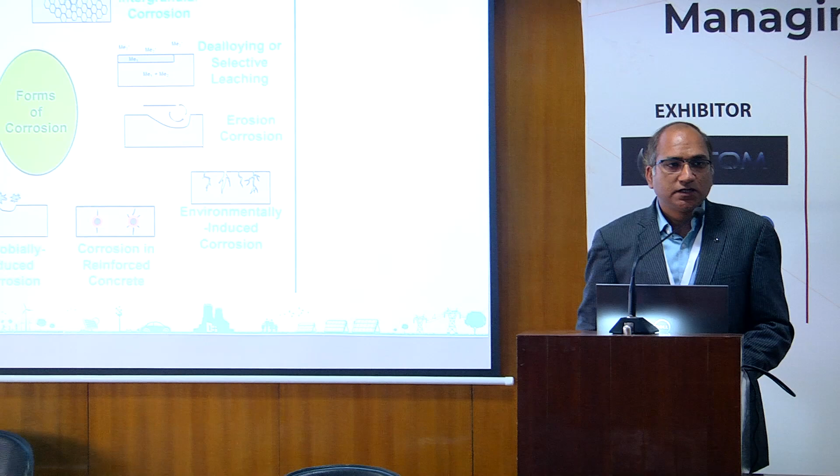The forms of corrosion, what we learn from different seminars and workshops - of course we are not experts in this. The gathering itself is so much expert in explaining these different forms of corrosion.

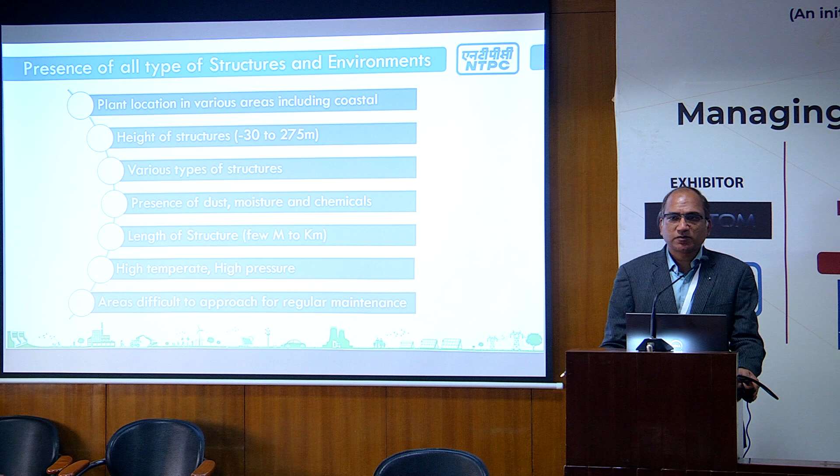Now coming to the power plants, what is different with relation to corrosion. When we talk about so many industries, I think thermal power plants are one of the industries which are most affected, because we have the most varied opportunities to invite corrosion.

We have plant locations in all parts of the country, whether it is C1 or C5 category, it doesn't matter. We have structures of varied heights, whether underground up to 30 meters or above ground up to about 275 meters. We have a variety of structures, and the corrosion effect is present in all types of structures. We have the presence of dust, moisture and chemicals, which are the main key players in the role of corrosion.

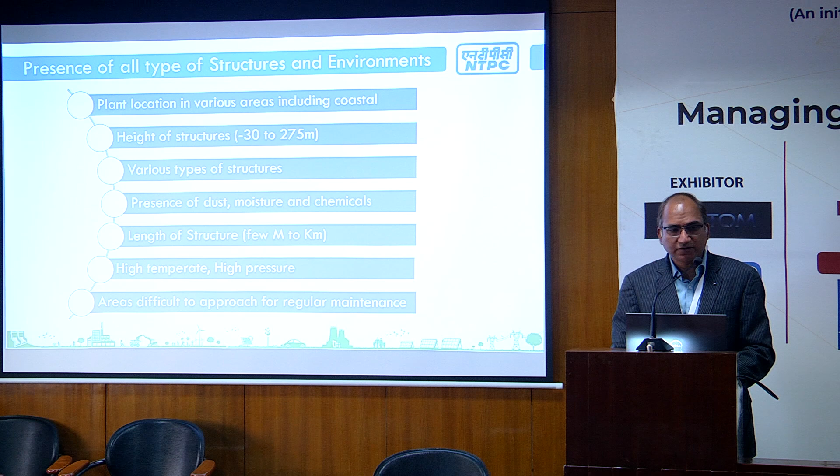When we talk about the size of structures, we have a few meter structures as well as few kilometers also. We have high temperature, high pressure, and high difficulty areas for approach. So basically, we are the most affected industry related to corrosion.

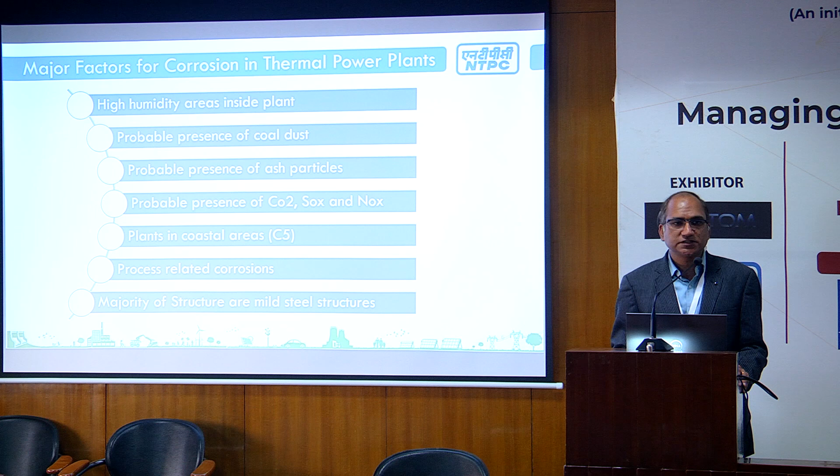In our industry, the major factors which affect our structures and lead to corrosion are humidity, the probable presence of coal dust - of course the plants are designed such that we should not face any coal dust or ash particles, but the practical problems cannot be ignored - the presence of SOx, NOx and CO2, plants in coastal areas, then process related corrosion because there are many processes involved in thermal plants, and of course the structures are mainly steel structures, which are more prone to corrosion.

Combining all this, I am summarizing the corrosion in our thermal power plant into two categories. One is process related, which we face in different processes, whether it could be an FGD plant, a water treatment plant, or a boiler structure. These process related things we take care of in the design parameters, but of course we have to face surprises.

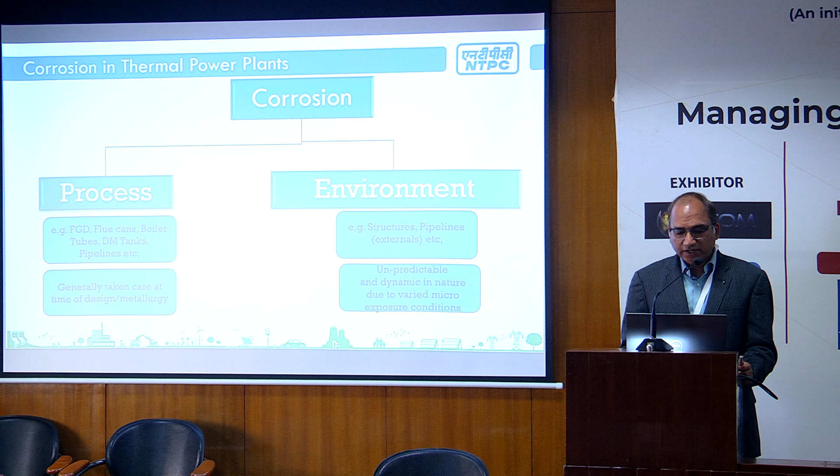Then second is the environment. This is common for all of us. We have structures and pipelines everywhere which are affected by the environment and corrosion, and these are some unpredictable and dynamic things which we cannot control.

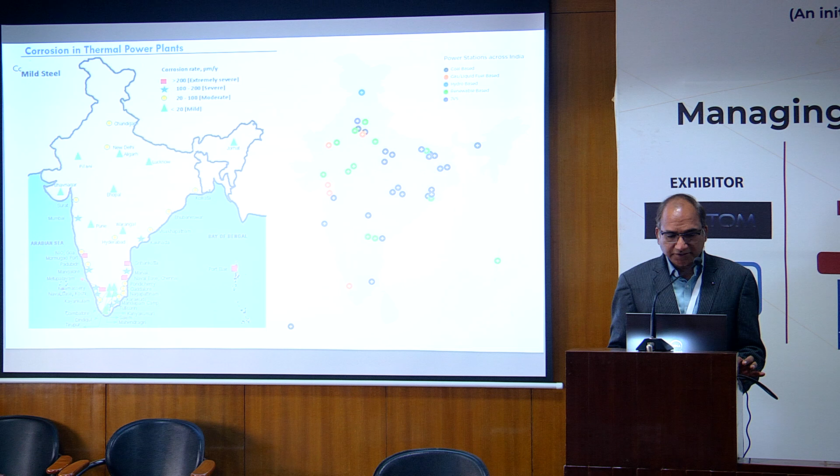When I talk about the volume of corrosion in our thermal plant industry, I want to correlate with two figures of cost and area. The paint procurement yearly may be up to the value of crores - 40 crore is just a figure. And when I say about the painting area of work involved, it is a few lakhs of painting in only a single system of the coal handling plant. So I'm just quoting these two figures to correlate how big the problem is for our industry.

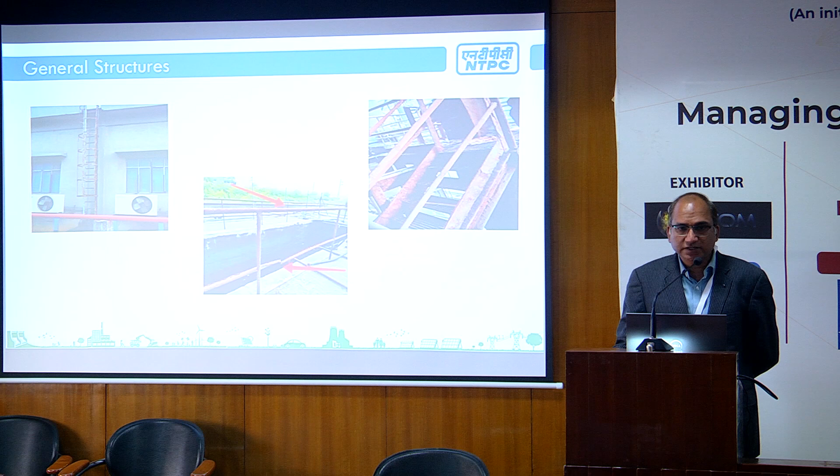Just sharing a few of the problem areas in our structures. These are pics of small structures where we are facing corrosion problems, like a staircase or a railing. These structures are small, but the effect could be a lot of safety hazards for us.

Coming to the big structures of the coal galleries and conveyor galleries, we are facing a lot of corrosion related issues. Because of these issues, we have to do continuous maintenance. I wouldn't say the structures are failing, but continuous maintenance and monitoring is required.

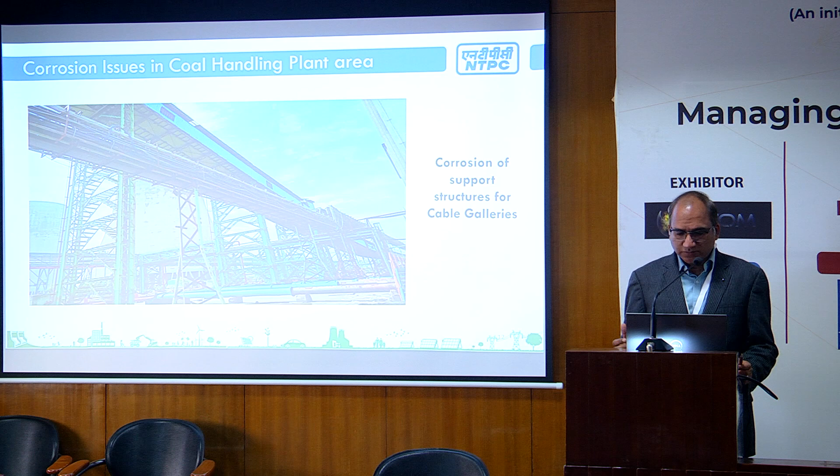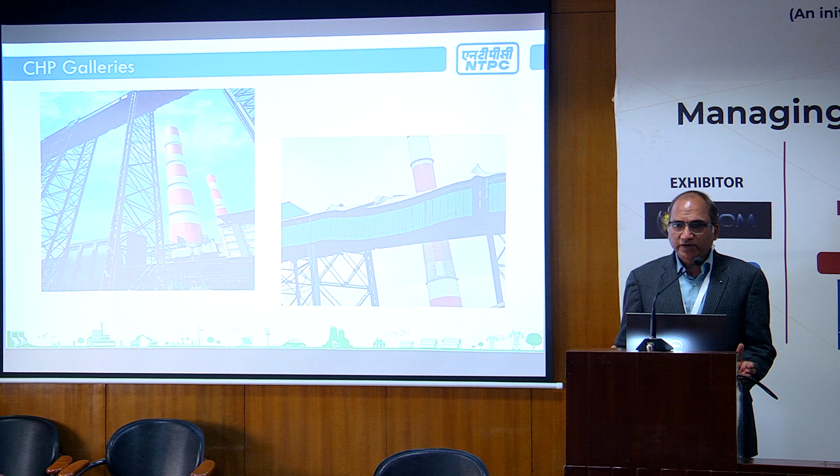A few more pics of the CHP galleries. Here we have CHP galleries of height up to 60 to 70 meters. So to maintain them, to paint them, is itself a big task. As a civil engineer, even providing shuttering is a big task, let alone the painting, how to do it.

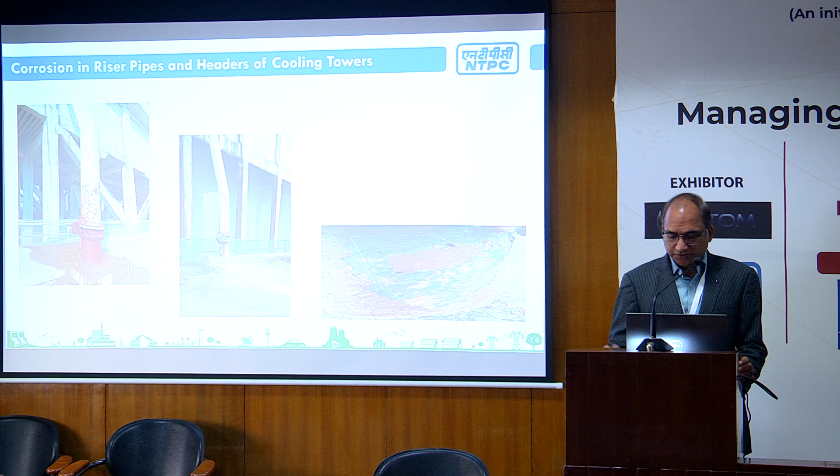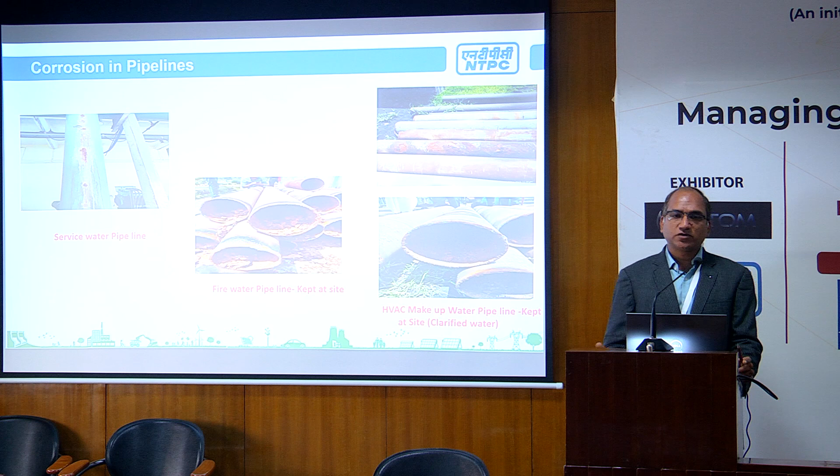Coming to some water related structures, in our cooling towers, in our pipe connections, everywhere we are facing the problem of corrosion. Sharing a few pics of the plant where we face these problems. When talking about thermal plants, we have many pipelines for makeup water requirements and various process related environments, and everywhere we face this corrosion problem.

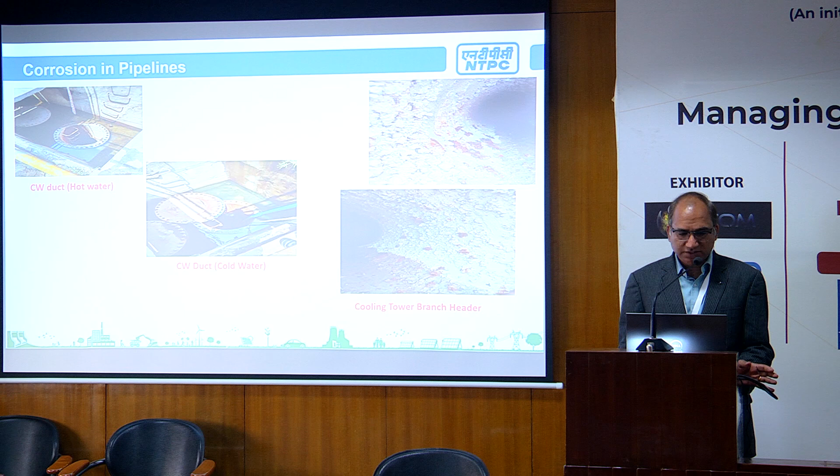There are some pics of our CW duct where we are facing problems. All these ducts are underground, so corrosion there really creates problems. We also have sea structures in sea water, where the problem of corrosion is even more.

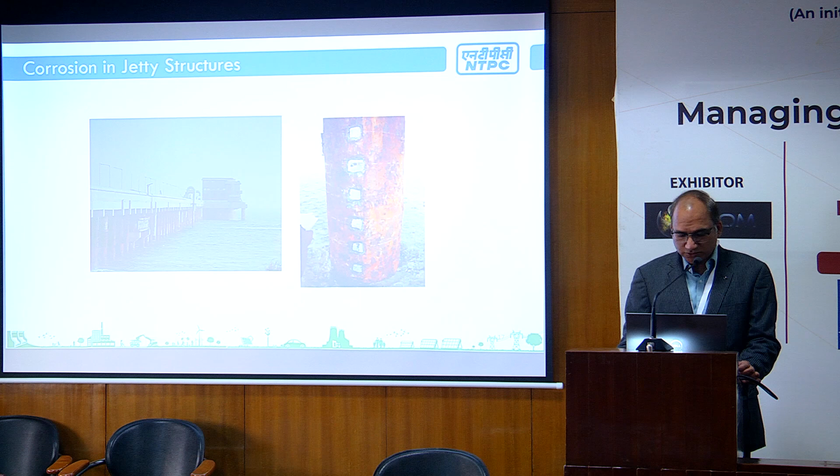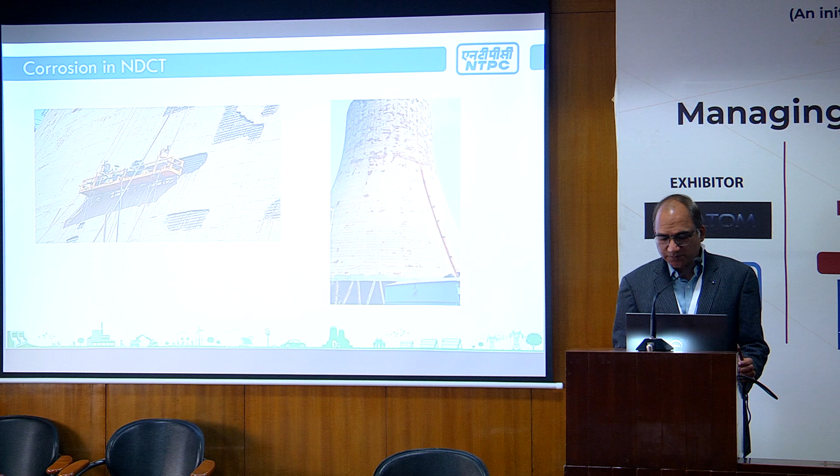So we are facing a lot of problems, and we have many structures where we need to solve upon this. This is a pic of our NDCT cooling tower, where corrosion related issues are there, showing how the concrete is getting spalled away because of corrosion of the reinforcement.

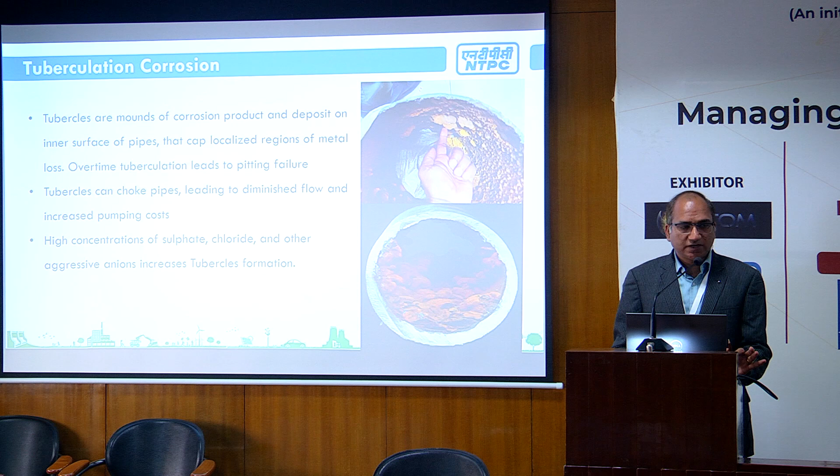Tuberculation corrosion is also observed in our fire pipelines. So this is just a problem statement that we are facing, which we have to deal with. As mentioned in the morning session, the theme relates to managing corrosion - so we are not avoiding corrosion, we are managing it in some way.

Some of the solutions we have adopted in our running plants for mitigation of corrosion: first is replacement of material. We have replaced materials in some cases, like in the pipelines, across different areas and approaches. We have also increased the efficiency of our drift eliminators to decrease moisture content in the environment, so that our steel structures get less corrosion.

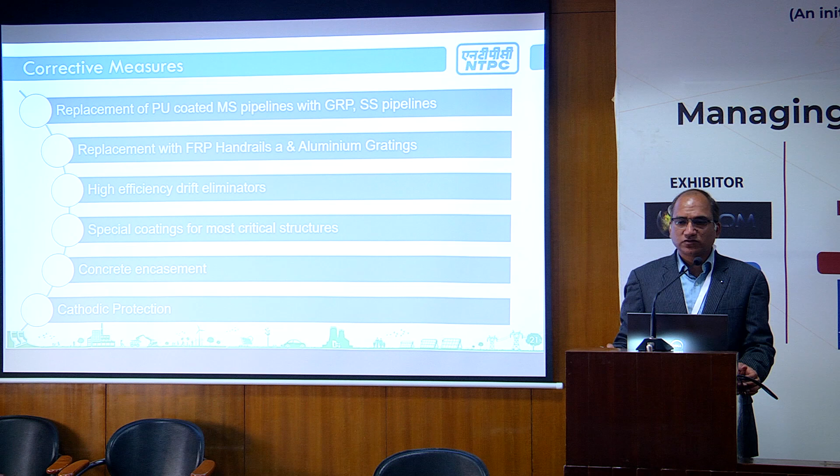We adopted special coatings for maintenance works and for coating application and painting works. We are also providing concrete encasement in some cases, because basically the corrosion we face is at the interface of a concrete floor and a steel structure. If we provide concrete encasement, this may prove to be a good result in future.

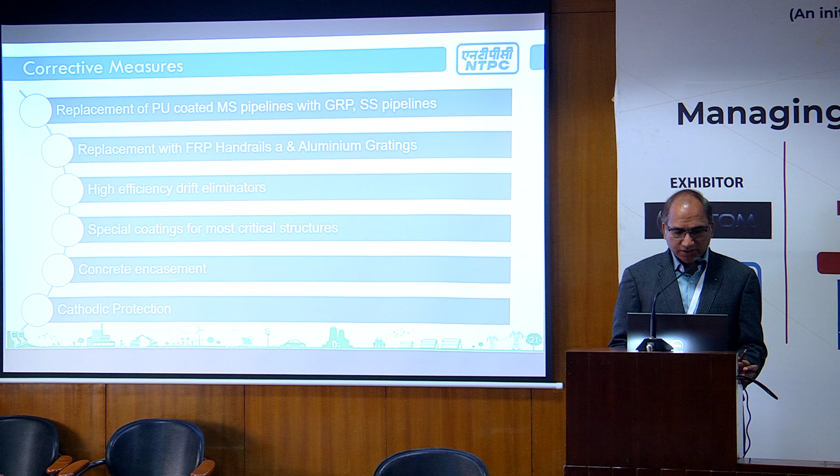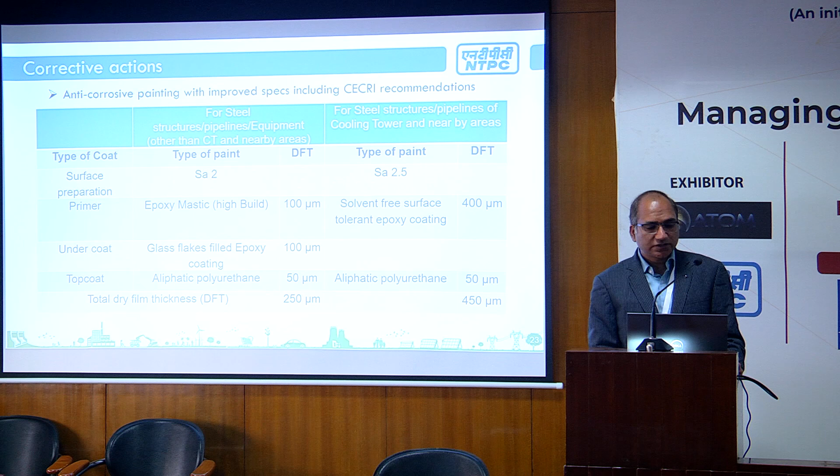We adopted changes in our coating systems also, taking help from renowned institutions like CECRI and others. They have provided good guidelines for improvement in our painting specifications and in some part of the repainting works.

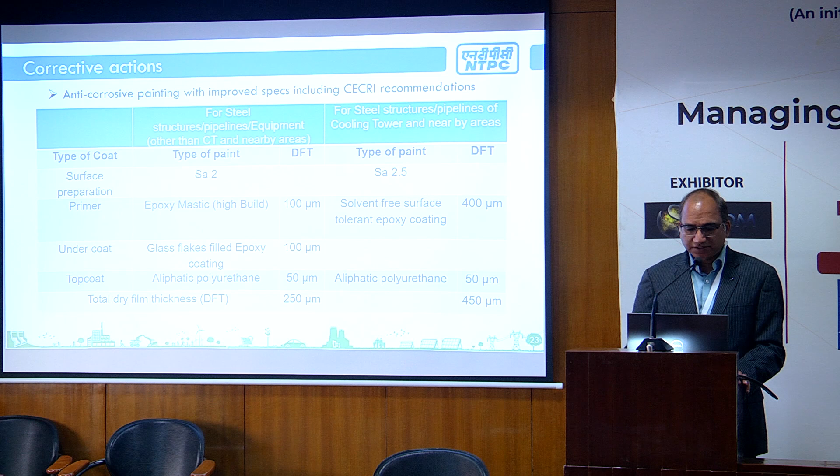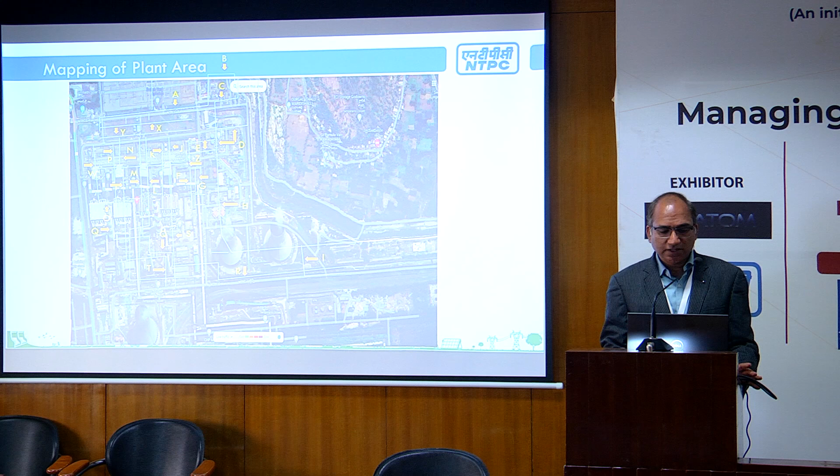Some good practices we are adopting as NTPC: one is related to formation of a corrosion cell for critical plants. In our critical plants, we adopted a protection cell methodology, dividing the complete plant into different zones, and based on that zone, taking protective measures according to how the plant is affected in different areas. The idea is similar to how C1 to C5 categories divide the complete country - our idea is to divide our plant also into C1 to C5 categories, because the condition of C5 category is not only in coastal plants, it may occur in an individual plant also.

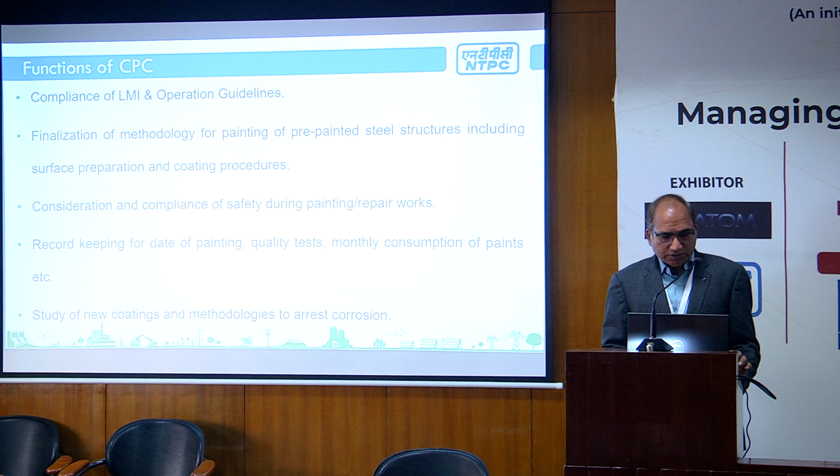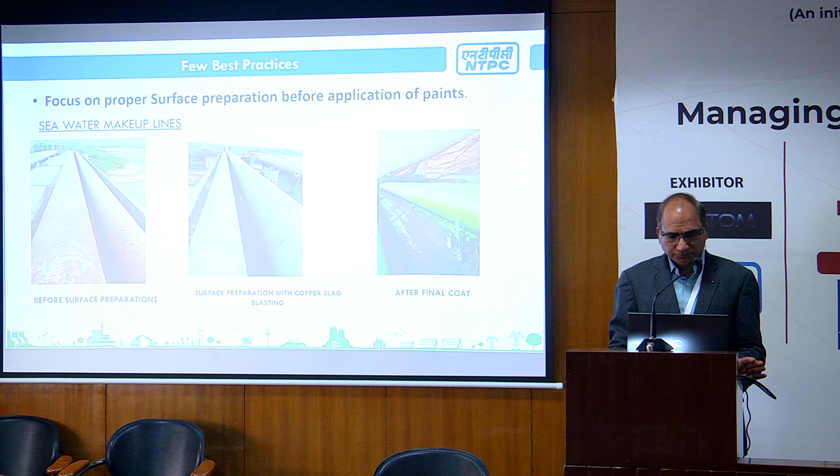Just keeping these slides that we have done the before and after effects of this. I am directly coming to what we need in the future because I have just 1 minute left. So what we need from this forum and from further programs like this is an effective coating system.

Our ED sir has also told that because of the lack of standards, we could not adopt some of the coating criteria, some of the coatings available in the country. So for that we need to work upon.

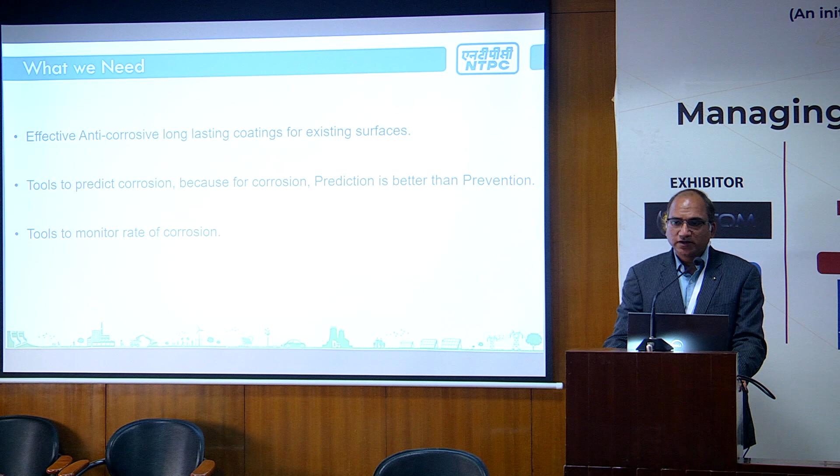Then tools to predict the corrosion, because prediction is better than prevention. Prevention is better than cure, that is an old saying, but right now, with respect to corrosion, we have to say that prediction is better than prevention.

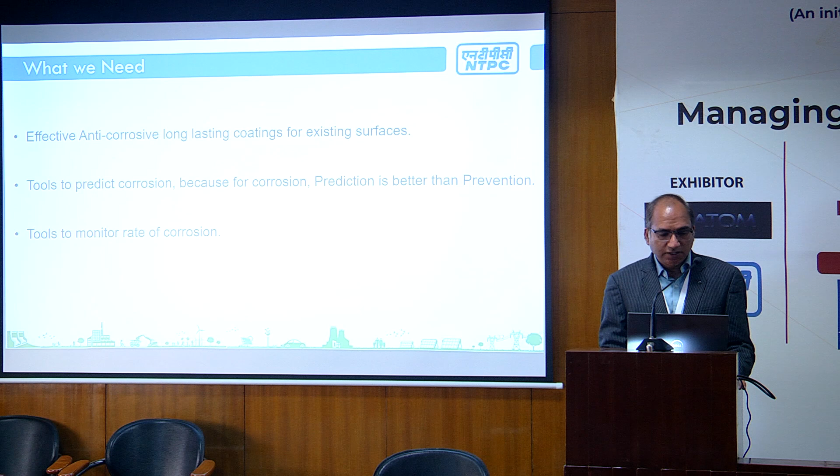And definitely, tools to monitor rate of corrosion, because we are not avoiding the corrosion, we are monitoring the corrosion. So if we have the tools to monitor the rate of corrosion, at least we can define where we are and how long we have to go for a particular structure.

Let me complete this presentation by saying that let's play our part in this collective war against corrosion so that we can have a better future.

I missed your last line. If you can please use your mic. Can you hear me now? Otherwise come forward. Okay, come forward. Now I can hear you.

Thank you, very nice presentation. As a thermal power producer, I want to hear your experience with corrosion under insulation and how you deal with it, how big a problem is it for you?

Corrosion under insulation, what I could understand from your query is we can talk about maybe the pipelines where we are insulating, and it may be in some of the structures also where we are providing the insulation. So we are providing the insulation basically to take care of the corrosion and to control the temperatures also. But in some of the areas, even after providing the insulation, we are not getting the results.